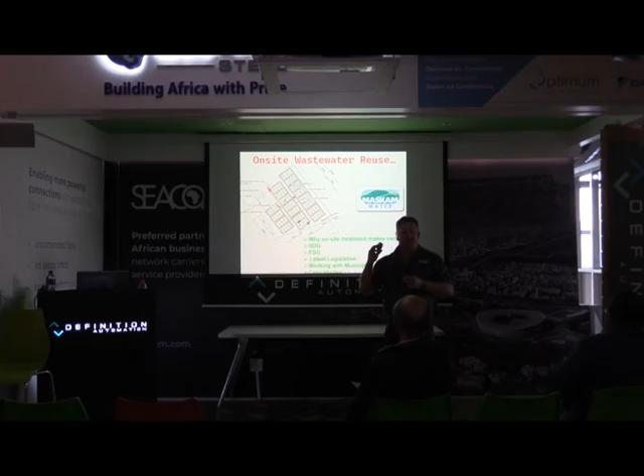I've been asked, did I do a presentation 2 or 3 years ago? Yes, I did. There's 1 or 2 slides that will overlap, but a lot of things changed in legislation, and I specifically focused the first part on where we are in terms of legislation and how we read legislation, because I've realized that often people don't understand what the law actually says. And I'm not talking about just people sitting here, I'm talking about people in municipalities and in government departments who misunderstand or misread legislation sometimes, and it can be a block. And if I can help you unblock that for development to move forward, then I'd be happy to do so.

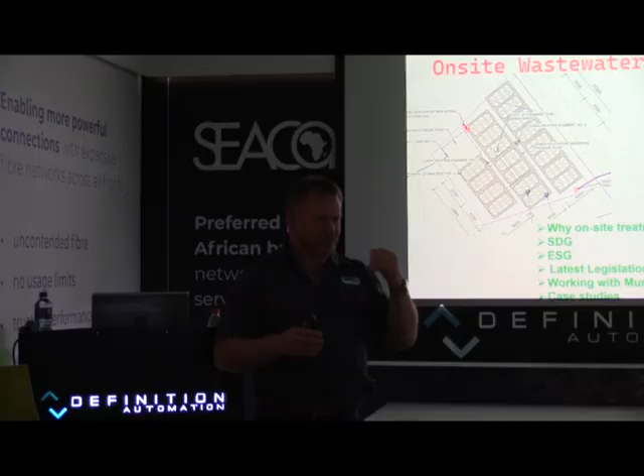Why do on-site treatments make sense? This is the current situation, or traditional situation. We abstract water from a water course, we treat it, we use it, we dump it, treat it, dump it. Now in Cape Town, this often goes to the sea.

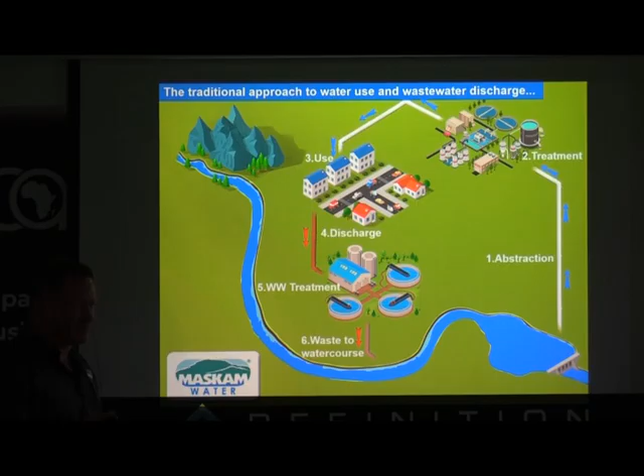And I said it in the previous session, I'm going to say it again, and I know there will be people taking me out for this, but then so be it. What makes no sense to me, in a Cape Town situation, we treat 600, 800 megalitres a day of wastewater, we pay money to treat it, then we dump it into the sea, and now we're spending billions to recover 50 megalitres a day of seawater in terms of reverse osmosis. It doesn't make sense.

Why would you throw away water that you've just treated, dump it into the sea, and then spend more money to desalinate seawater? And they tell me, no, it's to build water resilience. Nonsense. We're dumping 600 to 800 megalitres a day. We're abstracting 50 when the plant is up and running.

If you're on the Skeleton Coast, you've got nothing but seawater, then you've got to do RO. There's places for everything. I'm not against RO. I'm just saying we are wasting money in the way we go about water at the moment.

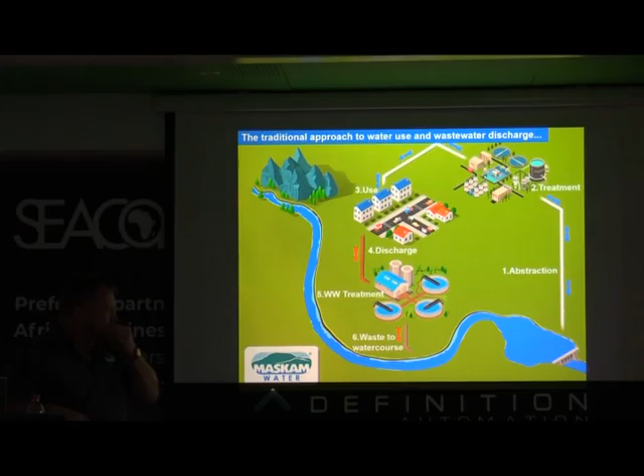The other thing, if you look at this picture, this is true for Bloemfontein. They dump there, and none of the wastewater treatment plants work, by the way. So they dump raw sewage into the river that feeds the dam from where they get their drinking water. Only mankind can be that stupid, eh? But the guys in Gauteng tell me, no, that's not a problem, because we didn't discharge there, we discharged at that point, below the wall there. I said, guys, that's great.

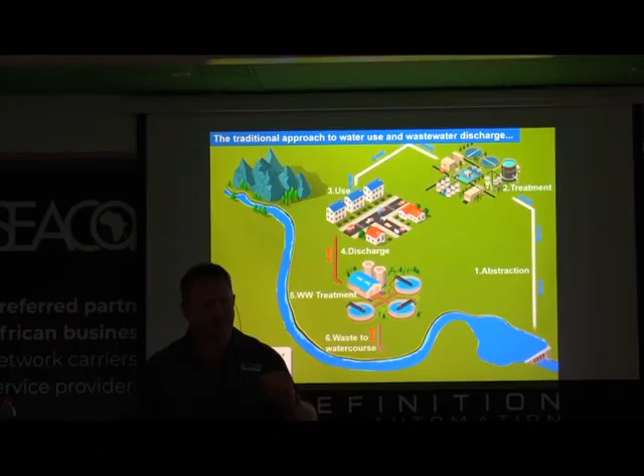Who of you will agree with me that eating healthy is good? And there was a crowd of over 100 people, and everybody put up their hands. I said, okay. Who of you enjoys some nice fresh grapes every now and again? And everybody raised their hands. I said, now you think that you discharge your wastewater into the Vaal River below the dam and you don't have a problem. You see, in Upington, the farmers have an E. coli problem. And that E. coli problem comes from you guys, down the Vaal and into the Orange River.

They pump out that E. coli, they irrigate their vines, and you import the grapes back into Gauteng. Full circle. So that mentality of it's somebody else's problem sometimes comes and bites you. But at the end of the day, we waste a lot of water the way things are currently set up.

What we want to look at is the possibility of on-site reuse. You may reuse 100% on-site, or you may use less than 100% on-site. Whatever you use on-site means you need less fresh water, you need less money to upgrade your waterworks, and you have less discharge, so you give your non-functional municipal wastewater treatment plants a chance to do a little bit better.

So we speak about a pollution problem that we solve. We speak about a freshwater availability problem that we solve, we speak about a lot of other stuff, as you will see, but in this point we also speak about water security. Because you have the water, you can use it more than once and increase your own water security or water resilience.

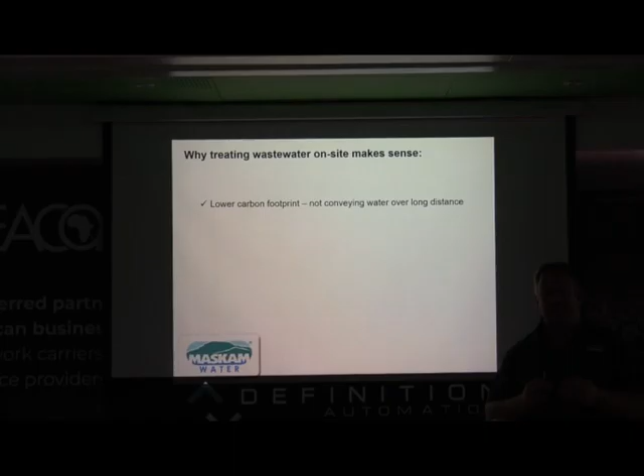Does that make sense to everybody? Right. So we say it lowers your carbon footprint. Now, water doesn't have a carbon footprint, does it? But your network of pipes, pumps, treatment plants. What is the carbon footprint of the network, the physical stuff? What is the carbon footprint of the electricity, coal generated? What is the carbon footprint of the chemicals used in the process? So your water that you use has a huge carbon footprint.

If you treat on site, you don't convey it over long distances. You bring down that total carbon footprint. Reduce pollution of our water courses. I don't think I need to elaborate on that one. Reduce potable water intake, because you reuse what you have, you don't take fresh water for everything. Increase water resilience. As I said, you have the water on site.

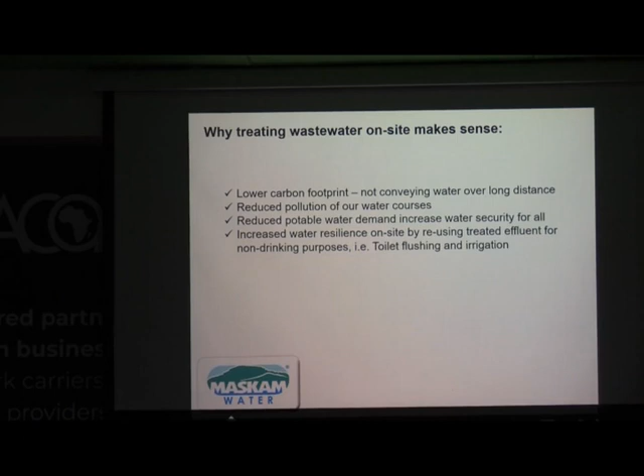Remember, if you look at Gauteng, there was a lot of media attention when they closed the Lesotho Highlands Tunnel and said, now Gauteng is going to have huge water restrictions. Well, they had enough water in the integrated Vaal system to sustain that period of closure. Now we had the Vaal Dam overflowing and flooding towns downstream, and we still had people in Gauteng without water. Now, how can that be?

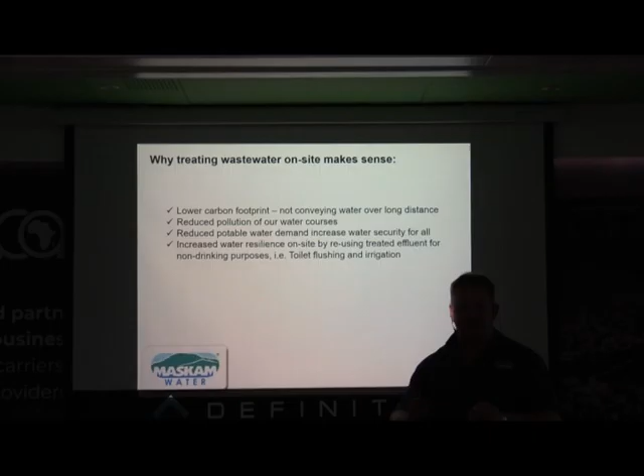It's very simple. The municipal infrastructure is falling apart. So you have the water, but you can't get it to the user. It's as simple as cut your veins, your heart is still there, you can still pump, but the blood is not going to reach your brain. That's the problem that we have with the water infrastructure.

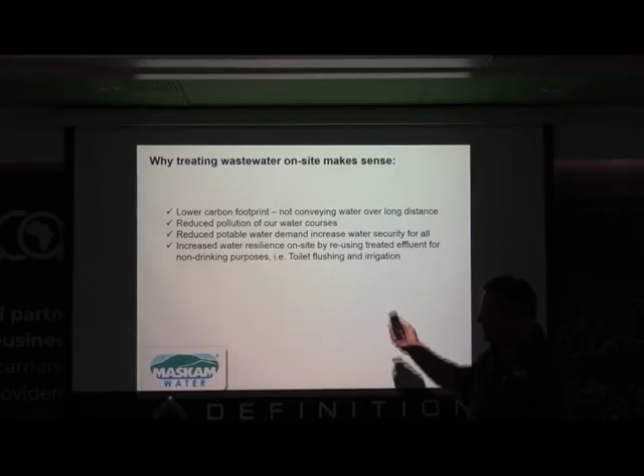You see, with electricity, we had an electricity generation problem, but we had a functioning network. Well, a few municipalities had problems, but in general we have a functioning network. So the minute you can add more power to the grid, everybody gets it. But in the case of water, you have the water in the dam, it's there, but the grid is falling apart. You cannot get it to the other end. And this is where on-site becomes very important in terms of water resilience.

Cost saving, treating on-site costs way less. And I'll give you an example. Cape Town's figures I don't have off the top of my head, but we did this exercise for somebody in Joburg. They have a commercial property. Now remember, your water cost is not only the cost of water, because linked to your water intake is a sewage cost. Now if you add the two together, you get your true cost of having water on site.

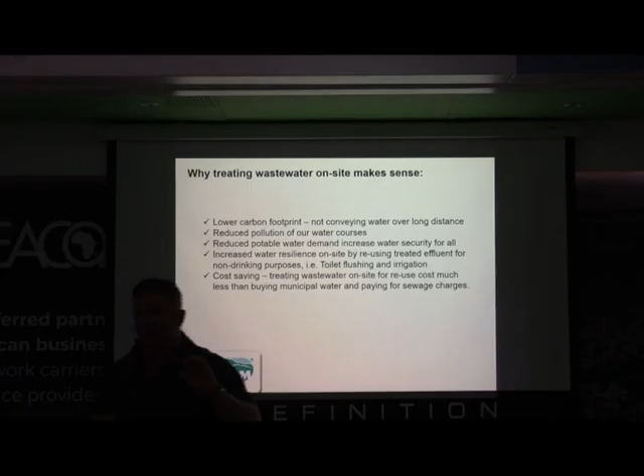So in Joburg, we did this one, and we took it off the customer's municipal bill. They pay 127 Rand on a commercial property per kiloliter for water and sewage. We can treat on site for 15. 127 down to 15. In their case, a saving of 1.5 million Rand a year. So it makes sense. And the more water prices escalate, I know Joburg's water prices went up 14% this year.

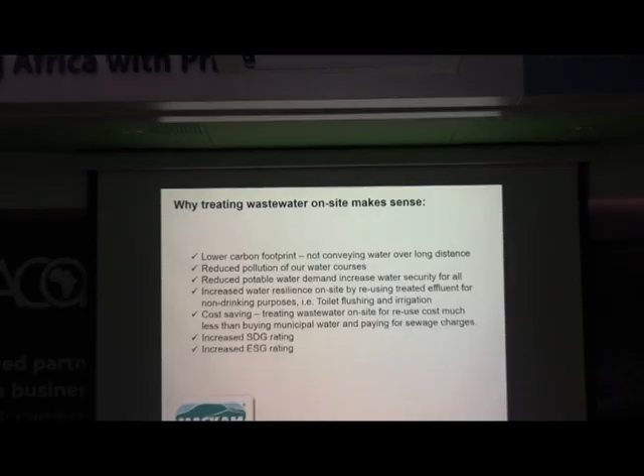Alright, increased SDG, we'll get to that, and increased ESG. How many of your customers need to get more points on ESG or SDG? You can help them by looking at their water. And if you want to go Green Star, that is now in the Green Star ratings as well. If you look at the SDG side, there's 17 of them, and we tick 14 of the 17 boxes, not all 14 at the same time.

No poverty comes with the installation, the maintenance, and sales of the systems. Zero hunger, you can use treated effluent to plant crops. You can speak to hunger there. And we've got schools and stuff that's doing that. Good health and well-being, a lot of the health problems we have come from polluted water or polluted soil where children play. When you address a sanitation problem, you address the pollution of the soil, you address the pollution of the water, so you address a health issue. I mean, where does cholera come from?

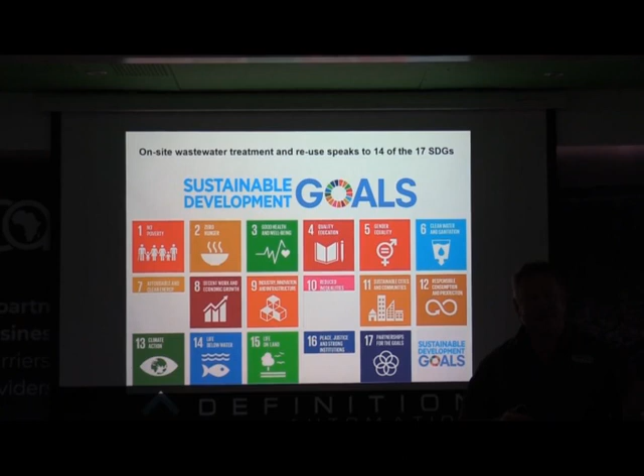Quality education. We often find that in your rural areas and your poorer areas, school attendance is higher where you have proper ablutions compared to a school that doesn't have proper ablutions. So that's why we speak to education, especially amongst the female learners. Gender equality speaks for itself, clean water and sanitation speaks for itself. Decent work and economic growth in two senses. In the sales, the installation of the systems, the maintenance of the systems, you create jobs wherever the systems go.

But this enables development to continue where otherwise it wouldn't be possible. So the direct benefit of this is small compared to the network that you unleash. Because the minute there's new development going up, there's streets, there's water pipes, there's electricity, there's security, there's garden service, there's domestics, there's all sorts of other stuff. It's a whole economy that you unleash when you develop. And if you don't have a wastewater solution, you can't develop. That whole network comes to a standstill.

Industry, innovation, and infrastructure. This speaks specifically to innovation and to infrastructure. Your infrastructure is now contained to the site and not the grid system. Sustainable cities and communities. With the reuse, you speak directly to that. As with consumption, responsible consumption and production, you are responsible in not polluting, you're responsible in reusing. Climate action, obviously. Life below water, because we don't pollute our water courses anymore. And life on land, because we can actually use the treated effluent to grow something.

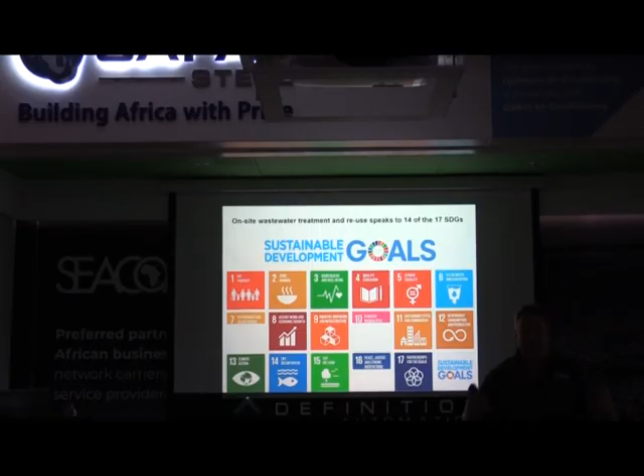And lastly, partnerships for the goals is where professionals, manufacturers, installers, maintenance contractors, the finance houses and the customers who need this work together in partnerships, not necessarily formal partnership as in sharing the same bank account, but partnering on projects to make this happen. So we speak to 14 of the 17 SDGs.

ESG, a lot of your SDGs are taken up in this, but your governance part is very interesting where you identify and manage the environmental and social aspects. So that's where your governance comes in, is to look at and see how everything comes together to the greater benefit of mankind.

There is a new regulation out. It's in a lot of the press, 6th of June this year. And this is going to change how your future developments will look.

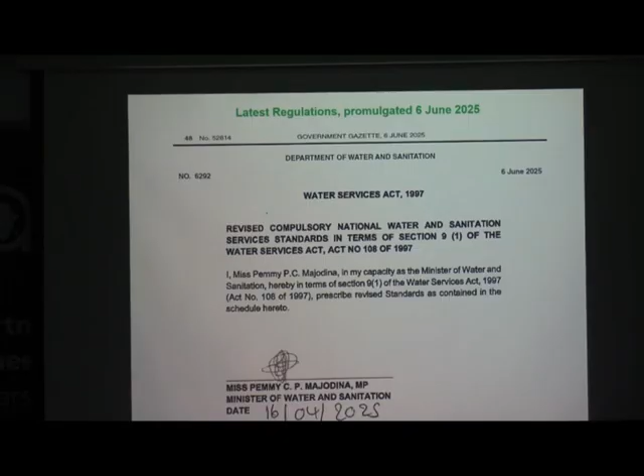How many architects do we have here? Engineers? None. Okay. I was in trouble in Bloemfontein for speaking too much to the engineers and not enough to the architects. So here you don't have that competition.

This will change how you design buildings going forward. I'm giving you one snippet now, we're coming back to this later, but this snippet says, municipalities and water services authorities are prohibited from approving bulk user connections to existing water and wastewater systems without having the necessary capacity to service that. It also says municipalities may not approve any new developments that will connect to an existing wastewater treatment system unless such a system has the capacity to deal with an additional load.

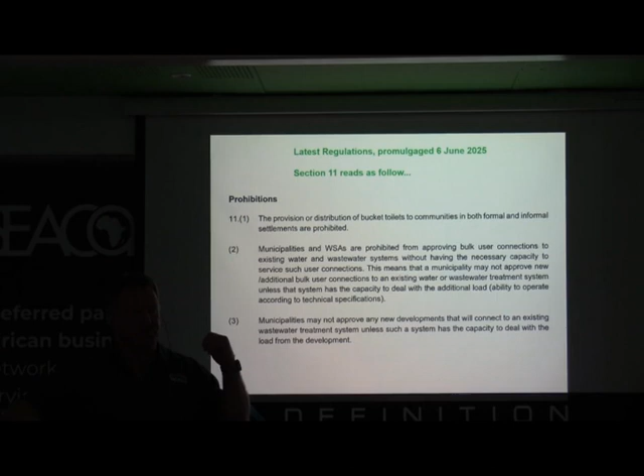What that means, in the previous session we had somebody here who said on Baden Powell they have a problem with a sewer line that is over 100% capacity. They're upgrading the plant on the other end, so the plant has capacity, but the sewage is pushing out through the manholes because the line is over capacity. In terms of this regulation, no new developments may be approved that discharge to that line because there is no capacity. It's not only about the treatment works, it's about the entire system.

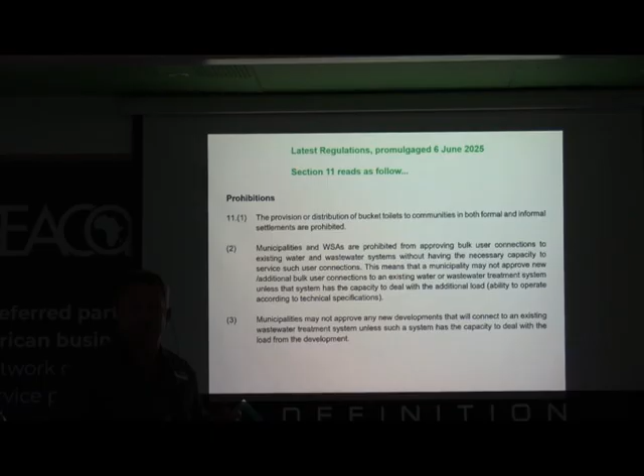Now we'll get to another slide and I'll show you there what I mean, but 80% of South Africa's municipal wastewater treatment plants are in a bad state. This stops all development in 80% of the country. So what do you think of that? What will it do to your business? What will it do to the economy? What will it do to your customers? It's good from a pollution point of view, but from an economic point of view, this is a mess. You agree?

There's light at the end of the tunnel, but we need to go through a few more things and I'll explain to you how it all fits together. But note that when you design, because many of you will not only work in the City of Cape Town, you work outside the city, you work in other municipalities as well. So this is something to keep in mind.

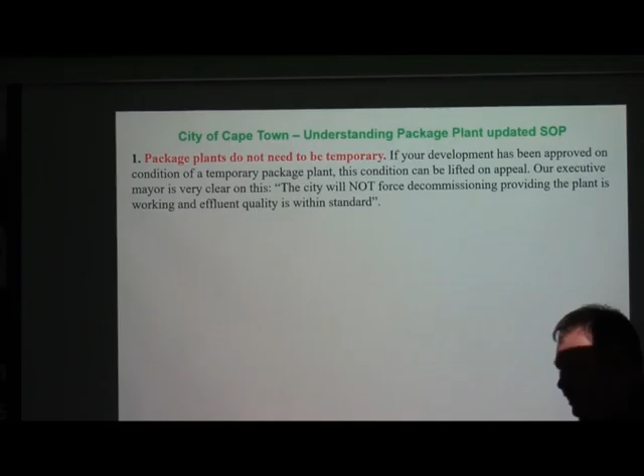Where do we stand with the City of Cape Town? And I won't say upset, but I'm disappointed that the city's communication on this is very poor. Remember in August of 2022, they brought out the standard operating procedure for package plants for the catchment areas of Zandvliet, Macassar, and Potsdam. And up until that point, they stopped all development for those catchment areas.

And then they brought out the SOP and said you can now develop if you install your own package plant. But when there's capacity, you must disconnect it and decommission it and remove it. Now, nobody is going to spend 5 million on a package plant to remove it 3 years down the line. That's a waste of money.

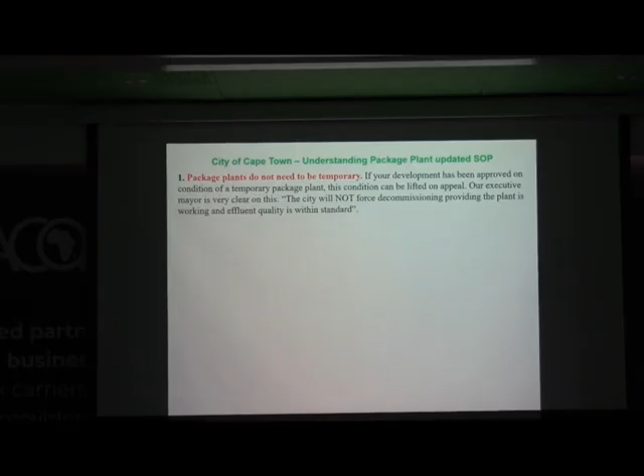So, what has not been in the official communication, but it's been repeated in many meetings and in workshops that I attended: Cape Town has changed that policy so that you don't have to be a temporary installation anymore. When there is capacity, you can now, as the owner, decide: do you want to keep using your package plant, or do you want to decommission and reconnect to the municipal system?

Just a show of hands for my own reference. How many of you knew about this? That it can now be permanent. That's what upset me. Because now there's one thing you need to be careful of. The system must comply to DWS standards if you want to keep it. Which makes a lot of sense, because if the effluent doesn't comply, you pollute.

So everybody who now ran and bought the cheapest, and I know there's a number of them, let's not go there. Everybody who ran and bought the cheapest junk just to get approval from the city, because it was going to be a temporary thing, they can't keep their systems because the effluent quality is not good enough. If you buy a proper system, you now can get all the benefits.

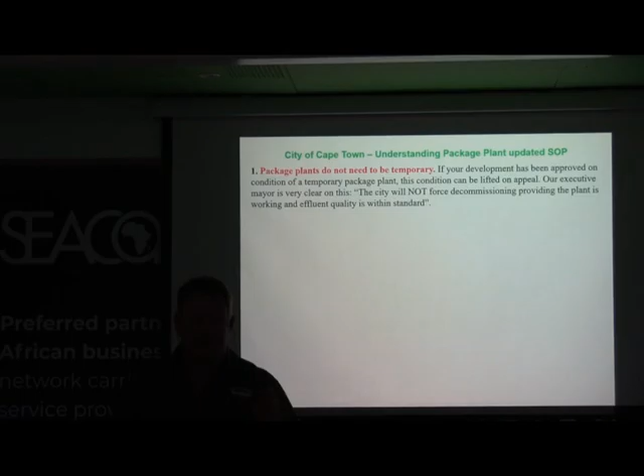And remember the banks, these banks are slowly catching up on this. There's already green bonds out there. They haven't really made water or recycling part of the green bonds, but that's coming. I can tell, working with them. So now you have a greener development. You don't have to decommission anymore. Your DC for sewage will be discounted. Do you know that?

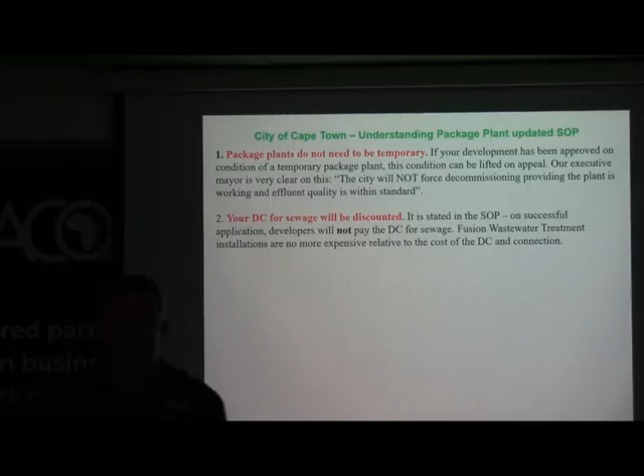If you install your own wastewater treatment plant and you don't connect to the municipal system, they won't charge you the DC for sewage. They will charge you the DC for roads and power and everything else, but not for sewage. How many people knew that? You see how this now becomes affordable? Because I spoke to a developer beginning of last year, and he asked me, what's the cost if you do group housing, gated community housing? I said, well, depending on the site, but you're looking at about 35,000, 40,000 rand for our kind of technology per house, family of 4.

He said to me, but Gerard, currently it costs me 40,000 rand a house. To pay the DC, to get the pipe to this network and the physical connection, costs me 40,000 rand a house. So what you're telling me is this is going to be no money out of my pocket. Because what I pay here, I save on that side. Does that change how you will interact with your customers and how you will design?

You will also not pay for sewage charges if you're not connected. They can't charge you for sewage because you're not making use of the service. So you save your customer money on the monthly bills, which pays for the running cost of the plant. Again, it doesn't cost them money out of their own pocket.

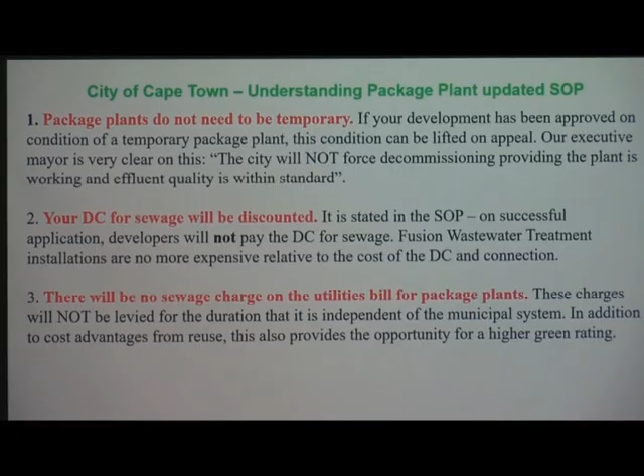And the 2018 bylaws of Cape Town say that all new developments and renovations must use water conservation and demand management systems or an alternative water source for non-drinking purposes. This is your alternative source for non-drinking purposes. And that has been confirmed in workshops with Cape Town. So you now not only solve a development or a wastewater issue, you immediately comply with the Water Amendment Bylaw of 2018, and you have alternative water for your irrigation or toilet flushing, your non-drinking purposes.

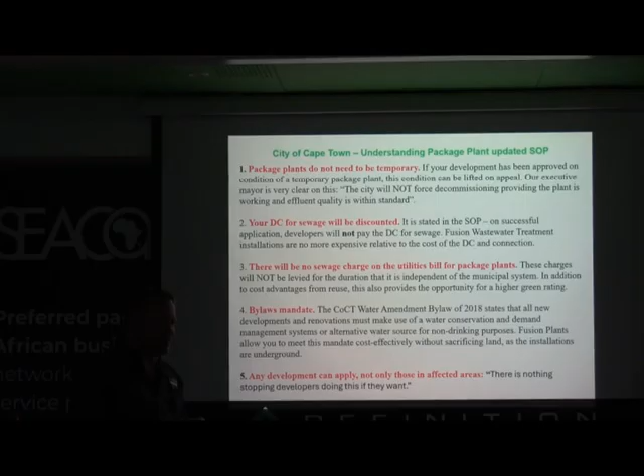And then they expanded this because people started complaining and said, listen, I have a development in the Zandvliet catchment area and I can install this there. But I want to do a green development in the Pinelands catchment area, and now they're telling me I can't. This is double standards. So the city said, okay, any development can apply. You don't have to be in the designated areas.

It is still on an application basis because they obviously need to know where the stuff is. You still have to do your WULA, your GA and all the other stuff that goes with it, but anybody can apply anywhere in the city now to install this.

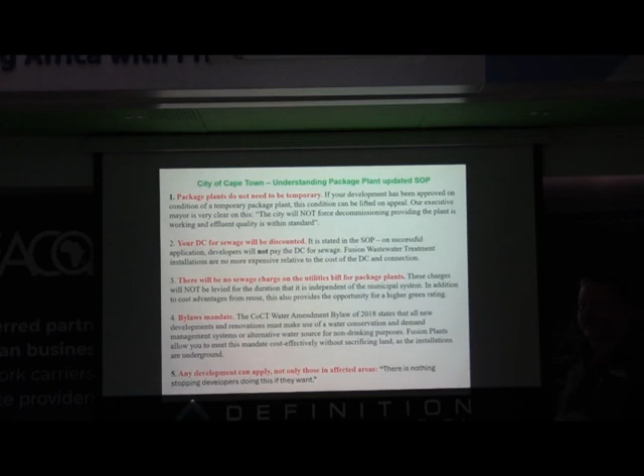Okay. Are there any questions on this one before I move away from the city? Yes, sir. To ask about your example, in the sense of there's a development, would you need one of these packages per household? You can have it for the gated community. It doesn't have to be per individual house, but you cannot cross property.

In other words, if you have a gated community, at the end there will be a responsible body for that gated community, and that will be the HOA or it will be the body corporate. You cannot cross over to the property next door that has a different HOA or a different body corporate. That's a different legal entity. But ultimately on a single residential, it's your house, it's your property, it's your problem. You can't give it to your neighbor.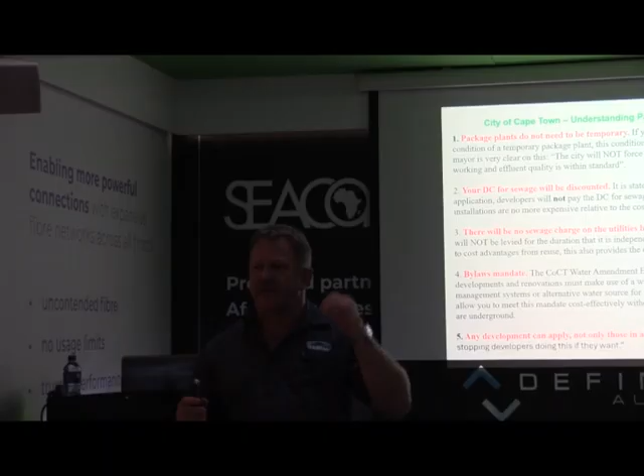But if it is in a gated community, a gated development, then this service will become part of the HOA or the body corporate responsibility, as will be the internal reticulation, the internal electricals, the fencing, the security, all of those services that will eventually fall under the body corporate or the HOA. This will form part of that. So as long as it's under the same legal entity watching over it, you can group them together. The cost is much better if you group them, and I'm answering questions now from the previous session.

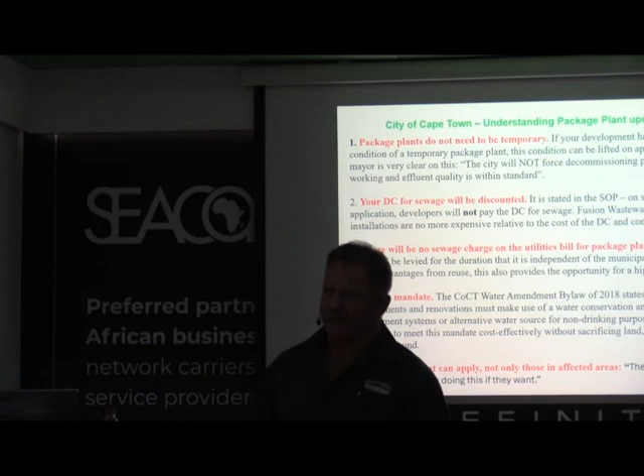A single residential, you're looking at just the plant cost as it stands on the factory floor without installation of 120,000 rand. If you group 20 houses together, the cost comes down to 29,000 rand a house as the unit stands on the floor. So there's a significant saving if you can group them together. It's not always practically possible, but the nice thing of this as well, and you'll see it when you get to the case studies, is if you have a large development, you don't have to bring all of that into one spot.

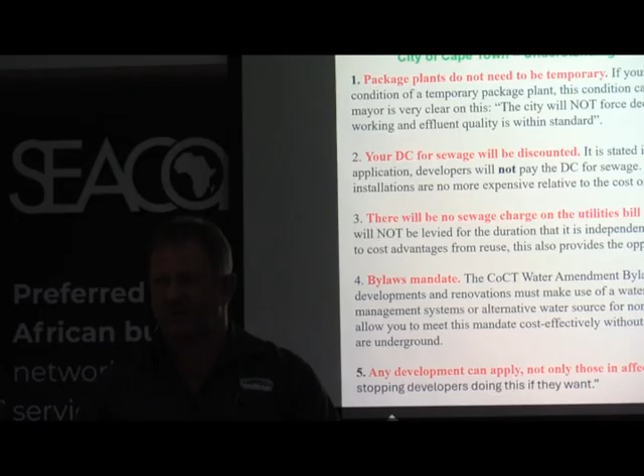So he doesn't have to fork out hundreds of millions to build a plant before the first house can occupy. That plant can do 500 houses, but house number 500 will only be sold in 20 years' time. Well, then the plant needs a rebuild anyway. So it saves a lot of those problems as well. I know it's a long answer to your question, but I just want to give some more context to it. But did I answer your question? Yes. Okay.

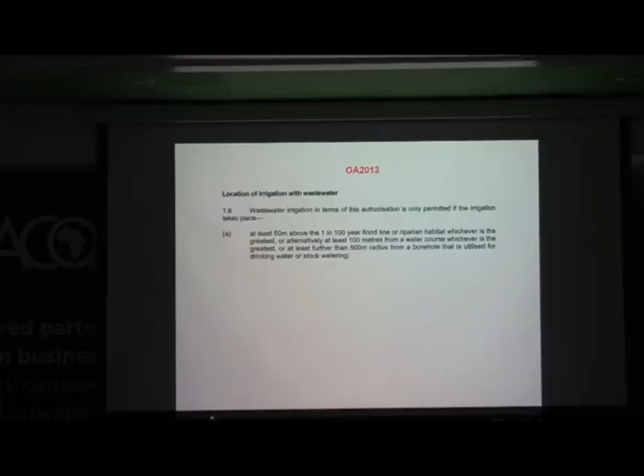Right. Now I want to get to the National Water Act, and this is the GA of 2013, and just show you our interpretation of the law is very important. Because the GA of 2013 said you may not irrigate with wastewater closer than 500 meters from a borehole that is utilized for drinking water or stock watering.

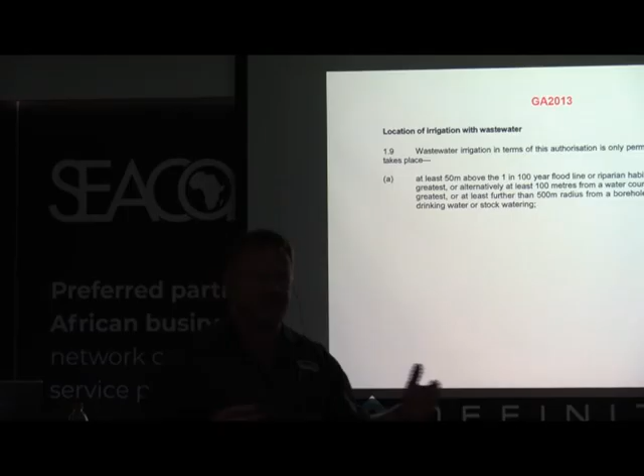So we had a number of applications done down here, because if you take the wastewater treatment plant and you pin that and you go 500 meters in either direction, you're on the neighbor's property. So what do you do now? Your neighbor is not going to want your shit. Sorry to be blunt about it. So the development can't continue, and we had a number of applications declined. Because what do you now do with the treatment? Where do you go? And I wrote to DWS.

Sometimes it takes a little bit long to actually get the message, but I got the message, and I wrote to DWS and said, listen guys, this legislation said you're not allowed to irrigate with wastewater. But we don't want to irrigate with wastewater. We want to irrigate with treated effluent that is treated to a standard where DWS say you can actually discharge into a river. So why can't we irrigate it? And the answer came back. The pink was my message to them.

And they said, within the range of 500 meters requires a license. That's a normal WULA, that's okay. If treated to a general limit or special limit could be considered under a GA and not a WULA. Look at the standards required for volume 0 to 50 megalitres a day and above. Now the development can continue, because now we understand what we're dealing with. We're dealing with treated effluent that we want to irrigate with, and not wastewater. But this has been misinterpreted by every single municipality in this country, I can tell you.

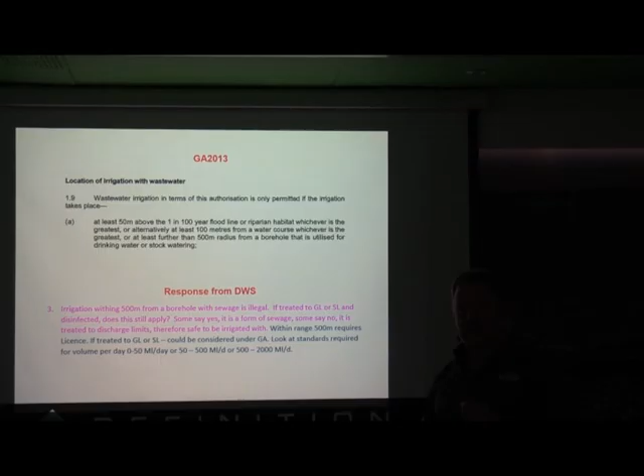So that's why I say, if you come across a problem, come speak to us. Let us help you where we can. I don't have friends that can do me favors, but I've been in this trade for 15 years now, and I've learned a lot about how the legislation works and how it's been put together. And how there's no ways to get around it. We don't want to get around it. We just want to implement it in the form that it was originally designed.

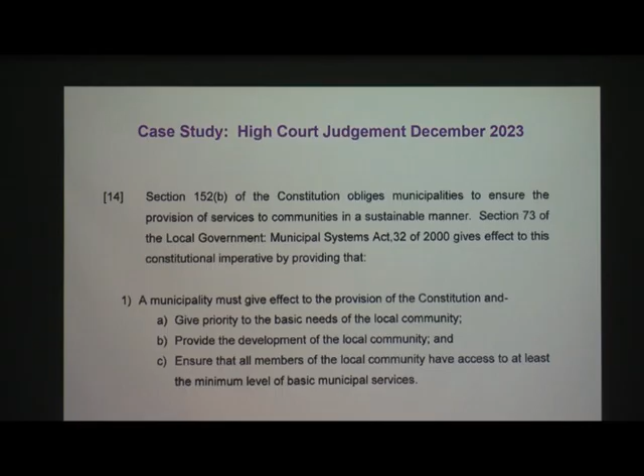And this legislation speaks to wastewater, there was an interpretation problem. Another one comes forward in this case study. Section 152B of the Constitution and the Municipal Systems Act of 2000, the Act 32 of 2000, say municipalities need to provide services. Municipalities need to provide roads, stormwater, electricity, water, sewage, all the other stuff. But it's not optional. The Constitution says so, and so does Act 32. Municipalities have to deliver those services.

Act 32 goes a little bit further, and it says a municipality may deliver such service through a third party. They may outsource it. But if that contractor doesn't perform, the municipality may render the provision of services through third parties. It does not relieve the municipality of its constitutional obligation. So they cannot say we outsourced it, it's not our problem anymore. If they outsource it, they still have the legal responsibility to ensure that the service is rendered. And if the third party doesn't perform in terms of the Act, the municipality needs to take over the management of that service so they can continue delivering the service.

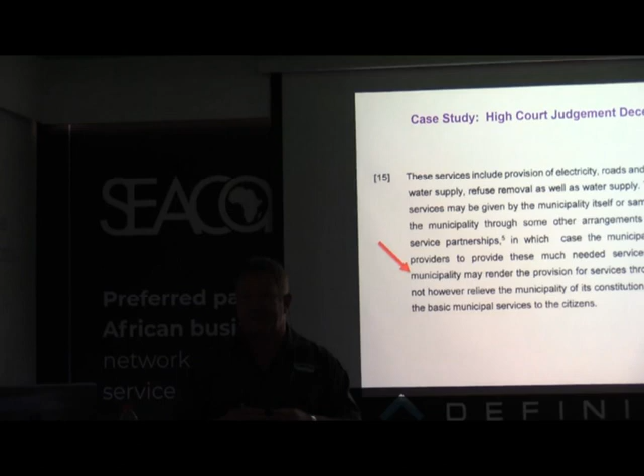With that in mind, municipalities took the stance of, we have to provide this service, so we have the sole right for providing services. You will use our service, you will pay us, finish and clear. In this case, the HOA took the municipality to court, and the court said it's an executive and legislative competency of the municipality and not a right of the municipality. In other words, they must deliver services to the community, but they don't have the sole right to deliver services to a community. You can install your private service. That's in essence what the court said.

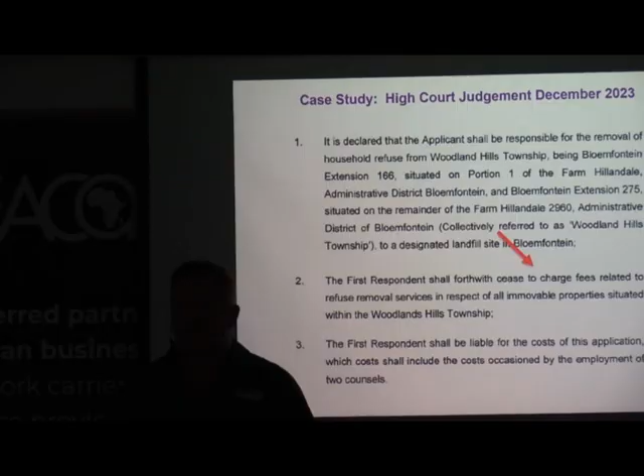The court went further and said that the municipality may only charge for services that they render. In this case, it was refuse removal. If you remove your own refuse, you don't have to pay them. And it actually said the municipality must cease charging fees for refuse removal for this specific community. It's a gated community. They do their own thing. They take their own stuff away. Why must they pay for it? And the court agreed with it. So this is very powerful. See the look on your face. You're thinking already about projects.

Now, another one. This is a government department turning down an application for somebody, or not really turning down, but putting provisions out there for somebody to do on-site wastewater treatment. And they say that the municipality must now sign an SLA with a private developer. And if the private developer's system doesn't work, the municipality must take over the running of that service. And they refer back to Section 152 of the Constitution and Section 73 of Act 32, the same one that we just had in the court case.

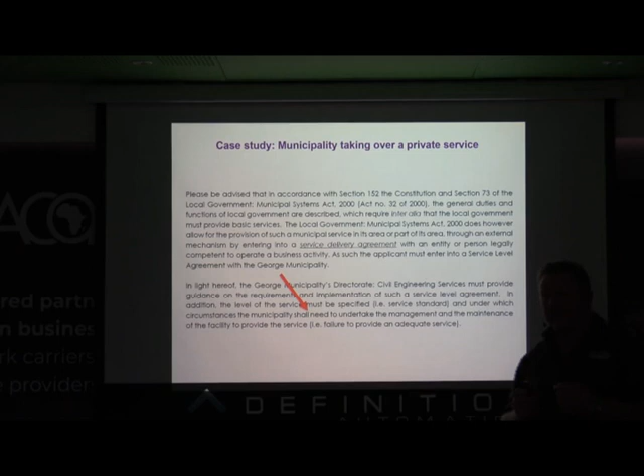Now there's a few problems with this statement. First of all, a government department cannot instruct a municipality to enter into an SLA. They don't have the authority to do that. You have separation of powers between the national, province and local. So this department cannot instruct a municipality to enter into an SLA. That's the first problem with this. And some people say, well, this is not coming from the department, that's how it is. No, it's not.

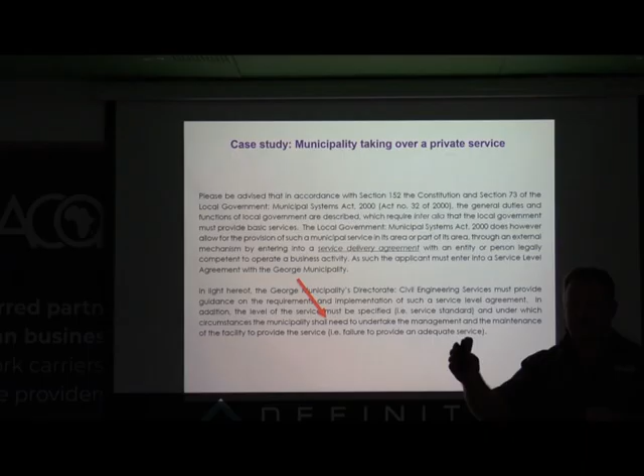Secondly, this is a private service on private land. Neither Section 152 of the Constitution nor Act 32 speaks to private service on private land. They're speaking to municipal services delivered to the community. So none of those are applicable in this case. The municipality may set certain things that need to be in place for you to deliver the service, but they cannot just take over.

And then you've got a legal opinion on this. And the legal opinion in essence said, if you read what they say there, and if the municipality were to take over the running of that service, remember, it's a non-moving asset, because it's a fixture on site. If the municipality would just at random take over the running of that service, it comes down to a subject that was debated a lot in politics over the last few years.

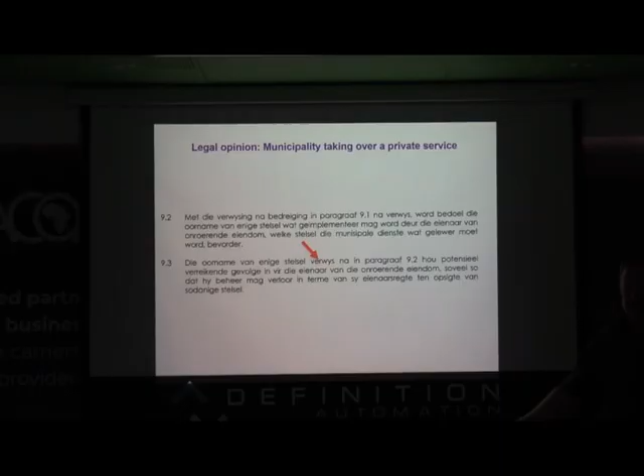Expropriation without compensation. Here's no court case. There's nothing here. The municipality says, sir, you installed that system, it's not running to my standards, so I'm now taking control over that system. Legally, that comes without. So the department is out of line. But a lot of people say, oh, the department said this, that's a higher authority than the municipality, so okay, now we've got, no. Understand the law.

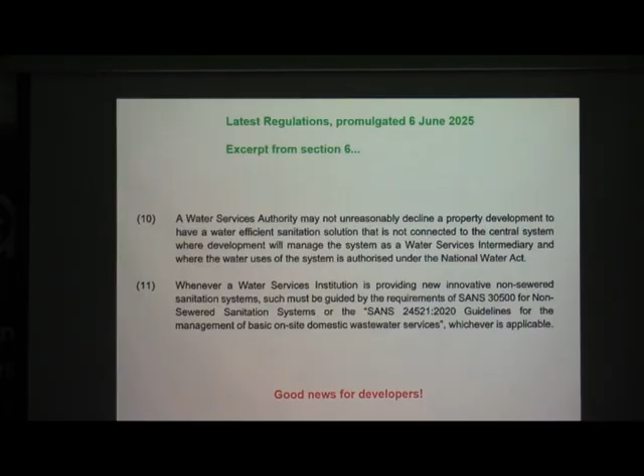It's largely the cost factors. It's all very well saying, okay, it's more viable to go ahead with a project of this sort of nature if you have a development where you've got 6 or 8, 12, whatever houses in a complex making use of the system. But making use of a system of this sort of nature for a single property, unless I'm wrong, it seems to me the amortization costs and period is probably going to be quite high.

That depends on municipality to municipality. It can be. But you also need to understand if you don't have a network, what do you do? If there's no capacity in the network, what do you do? So I don't see this as the golden leaf that everybody will run this way. I don't see this as taking over central systems. I see it as a combination. This is another solution. It's like PV solar on your roof. You may have PV solar, but Eskom still exists. This is going to be a similar situation in the water sector.

But what we found is customers don't have the skill to operate systems. So they need to get somebody from outside. Visual impact, they often look ugly. Where's the architects now? Visual impact. Noise pollution, because the pumps and stuff that run, they're noisy. Odor, you're dealing with wastewater. You're not going to want to live in that stench. High maintenance cost, high operational cost, poor quality effluent.

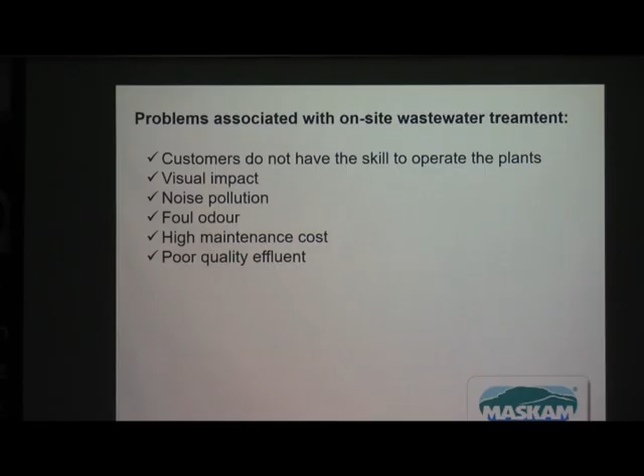Now what if I would tell you there is a system that can take care of that? Would you then be interested? They can show you. That's the baby one for a single house, and that one does 20 houses, just to give you an idea. 20, 40, 60 houses fit onto a truck. No customer intervention required because the system monitors itself. It will warn you if it's unhappy.

No visual impact, and I'll show you that. No noise impact. That system, if it had to run here now, you won't hear it. There's too much environmental noise, even if I shut up. No foul odor. You don't quite believe me if I say no foul odor, right?

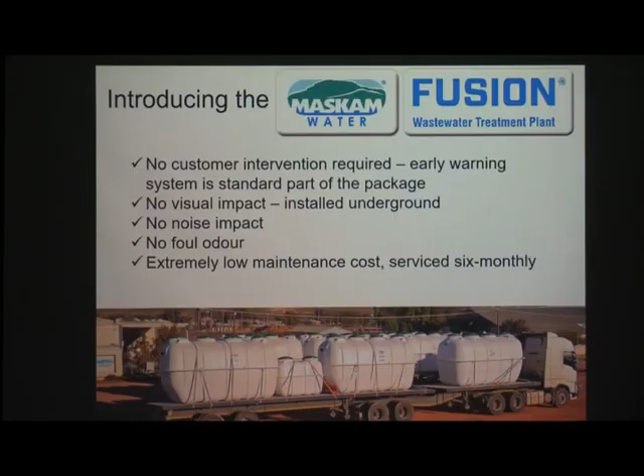What you will see when you look at brochures and marketing material, in some places you will see Clarus Fusion treatment system, and in some places you will see Maskam Water Fusion wastewater treatment plant. So it's the same name and we're now in competition. Clarus, we used to import from Clarus in 2010. Then we started doing some local parts. And in 2023 we bought the Fusion from Clarus in the States. And it is now South African. So it's the same system. We just bought it.

And the reason why we bought it, the parent company is Zoeller. Their main business is pumps. This for them was a fringe product. They do about $500 million a year of pumps. They build 4,000 pumps a day. So they decided to get rid of their fringe business. For me, it was my primary business and I bought it from them. So the way they used to supply Mexico, we now supply Mexico from here. That's how simple it is.

That's our factory in Vanrhynsdorp. So the fusion's been in South Africa since 2010. It's got some track record. Now 100% South African owned. Locally manufactured in Vanrhynsdorp, waar die mooi blommetjies is. More than 400 units sold, 10 African countries, Mauritius, UAE, South America, and I can actually now add Mexico. We've got some out in Mexico, we've got the Cayman Islands, and a few others as well. And installation and service contractors around the country, so we don't have to go out every time something needs to be done. They are trained contractors and we are still training contractors.

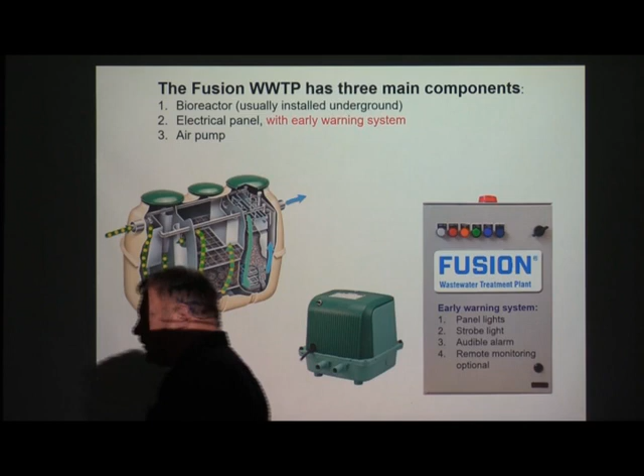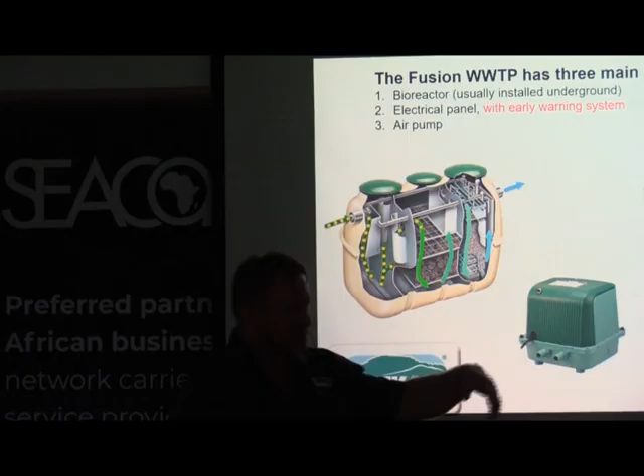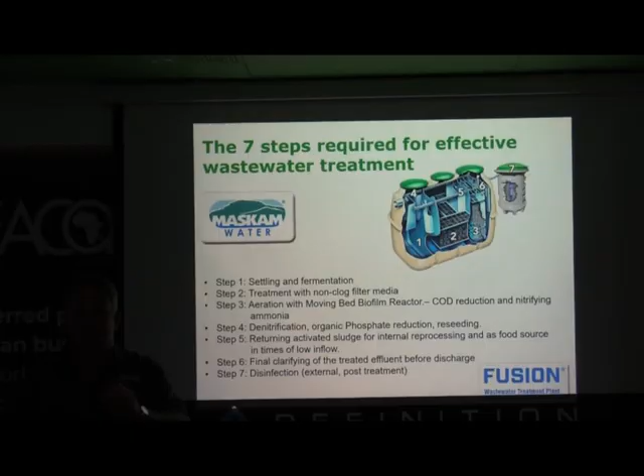And we see that most small systems on the market have 2 or 3 stages of treatment. That's not enough to comply to DWE standards. It's not enough to give you good quality effluent. There are 6 steps plus disinfection as step number 7. And I can mention by name which of the systems on the market has got 2 stages and which has got 3 stages. I've only seen one with step number 4, 5 and 6, and it is this one. If you don't have those steps, you cannot remove your nitrates, you cannot reduce your phosphates, you cannot comply. So when you look at systems, this one will be the more expensive one, I can tell you now. But for a reason.

If you now take a car and you remove your ABS and your traction control and your sound system and your auto headlights and your climate control and all those things that make the car work perfect, you take out your electronic engine management system and go back to the old carburetor system, you can build a much cheaper car. It's the same with these things. If you have 3 steps and you have 6 steps, there's a big difference in the quality of what you will get out on the other end.

It's as simple as that. And I always use the example because I had both. I used to have a Nissan 1 ton 2.5 diesel. The output of the engine was 55 kilowatts. Now I drive the new Navara 2.5 diesel, and the engine output is 140 kilowatts from the same engine block.

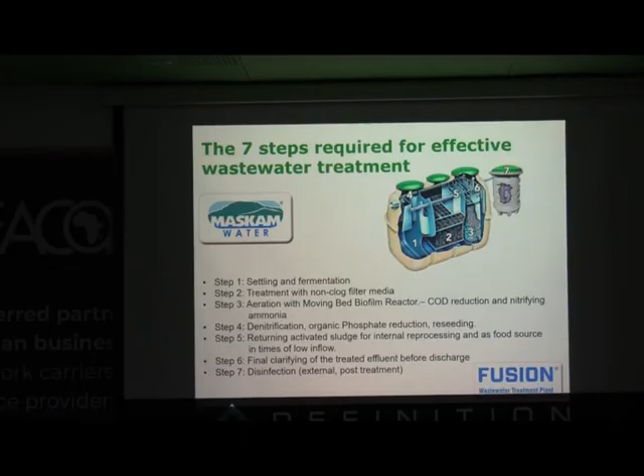Both are 2.5s. But it is now the turbos and the intercooler and the electronic management that take you from 55 to 140 kilowatts. Same with wastewater treatment. It costs a little bit more, but you get so much more out on the other end. So be careful, especially from a professional point of view, to specify something that will not comply at the end.

And if you're not sure, and you get quotes from different people, you're welcome to bring it to us, and we will evaluate it from a technical point of view for you. By then you have all the information, you have the pricing, and we will be happy. We've done it for a few customers already, and we will summarize and say this is the good and bad of everyone, and then you can make a decision from there.

And we've had that. We had a case where our plant just kicked butt compared to another one. The other one was slightly cheaper purchase-wise. The running cost was a lot more expensive than ours. And over a 20-year period, you could almost pay for our plant twice with the operating cost.

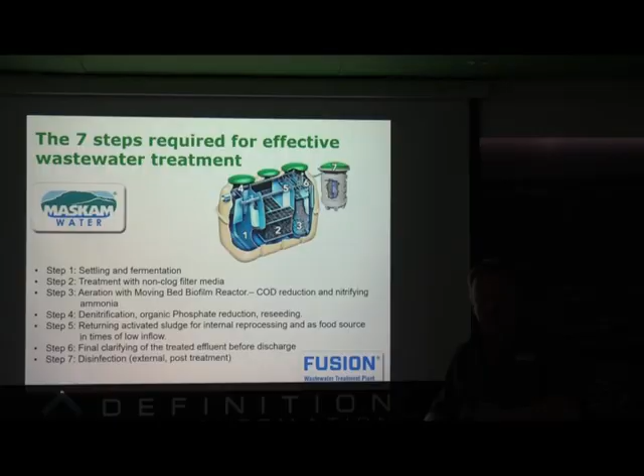But the customer at the end, he owns a Toyota truck dealership, and the guy who supplied this other plant buys all of his trucks from him, and he decided to support his customer. Good. He's got all the facts on the table now, and he can make a decision. Unfortunately for him, the other plant didn't work. That's another problem. But what I'm saying is we would be happy to help you sift through this, because this can become quite tricky. There's no obligation, no costs.

Show of hands. Who of you will be comfortable to install a wastewater treatment plant in the middle of the city, in the high density city area? 2, 3. Who of you will be comfortable to install a wastewater treatment plant in a building? Is that building a residential building or commercial? Commercial. In a commercial building in the city. In the basement.

Who of you would be happy to install a wastewater treatment plant in the city, in the footprint of the building, at the Department of Environmental Affairs? I won't answer. What if I told you we did it?

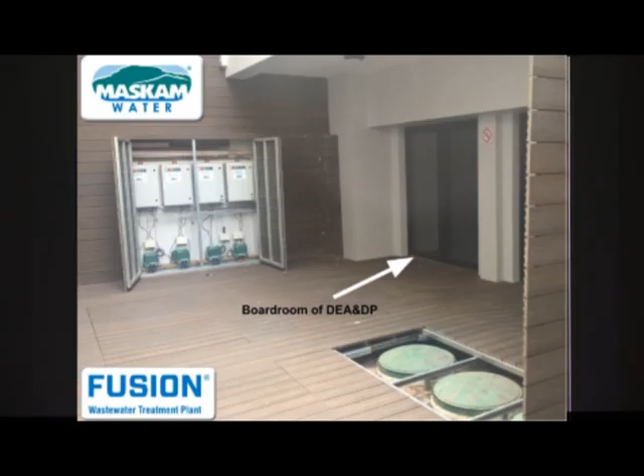Cape Town, Department of Environmental Affairs and Local Government, Premier's Office, Supreme Court, and that at one point was Parliament. There's no space, except for this quad in the middle of the building here. So we installed the wastewater treatment plant 2 meters from the boardroom of Environmental Affairs, in that quad. And for the last 6 years we flushed the toilets with treated effluent.

100% of the toilet flushes with treated effluent, 50% reduction on the water consumption. The other 50% is showers, drinking water and stuff. How much? In this case, it's 4 kiloliters a day. It's about 1 million liters a year. We can do bigger volumes, but that was the need for this building.

There are 4 small plants there. 1, 2, 3, 4. And the reason for the 4 plants is because we had to carry them through the building to get them there. There's no other access. You can't get a big plant through. You can't go over it, you can't bring a helicopter in because it's a no-fly zone.

So the only other way would be to put up one of these big cranes to get it over the roof. I mean, it takes you a day to put up the crane and then lift one tank and break the crane down. With traffic and everything, it doesn't make sense. So we put 4 small plants.

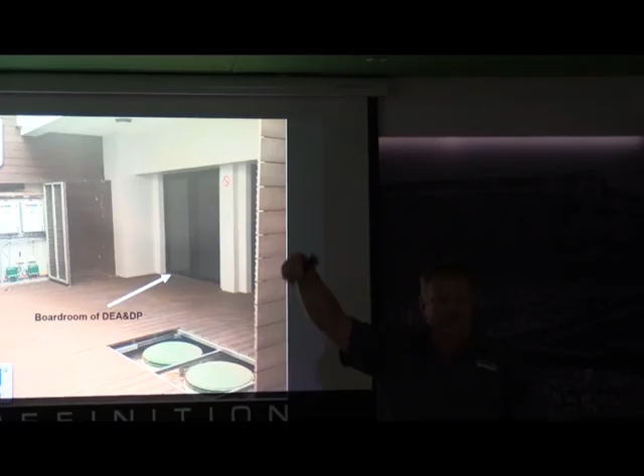How the system works, and now I took out those slides to cut down on time, and then I got the question anyway in the previous session. So what happens is on the ground floor, next to the clinic, they have the discharge point. They have the stacks coming down, joining up next to the clinic, and then discharged to the municipal sewer. On the roof of the building is a header tank that supplies the toilets, and toilets now have their own supply separate from the basins and the showers.

So when the roof tank drops to 80%, it demands treated effluent from the plants that's in the courtyard. So the treated effluent flows into a lifting station in the courtyard, and we then pump it up from there to the header tank on the roof. When the level drops in the lifting station in the courtyard, it demands raw sewage from the raw sewage lifting station next to the clinic.

So there, we pump the sewage up, through the ceiling, over the reception, back down in the courtyard, treated there, lifting station, up to the header tank on top, and then back down to the toilets. Quite an intricate system that we've got there, one part having to speak to the other. But it works for 6.5 years. And we often have meetings there, and you can go and have a look at it.

Okay. Who here would be comfortable to install a wastewater treatment plant in the city within the footprint of the building? Oh, now it's nobody. Now I had a few, and now there's nobody.

I want to ask you a question. What do you do with the waste as such? I mean, there's also a lot of fibers from toilet paper and that sort of thing. Those sort of products are biodegradable, or tree-based, if I can use a term. But they also take time to decompose.

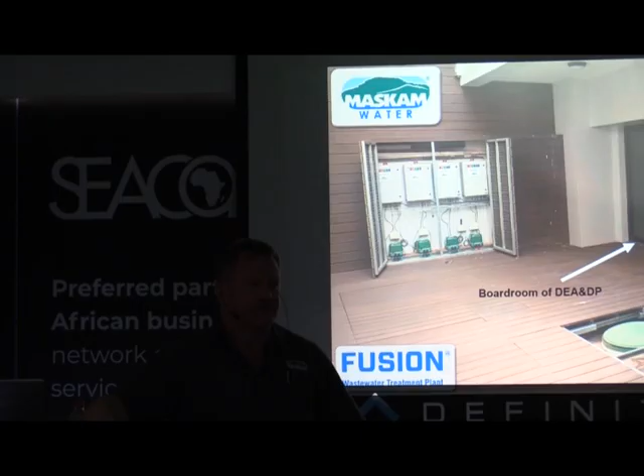So your biological stuff will degrade in the system, no problem. You'll build up a bit of sludge. Normally on your package plant you will remove sludge every 6 to 12 months. This one you're looking at every 4 to 6 years for sludge removal.

We were at a site this morning where engineers wanted to see this thing in operation. And it actually worked out quite nicely. It wasn't planned that way. My office phoned the customer and said, would you mind if we bring somebody there to have a look at the system? He said, by all means do it. So we arrived on site, and this is a long plot in Jamestown, Stellenbosch. And him and the neighbor share a common entrance. They get along well, there's no fence between them.

So as we drove down and stopped, the neighbor was coming up from the bottom. And he pulled over, and I said, I haven't seen you for a while, how are you doing, and so forth. And I said, well, these engineers just wanted to see this guy's system. I said, but while you're here, this man also owns a system, the neighbor. And the neighbor said, yeah, and the guy down there, if you just walk around the corner, that guy's got one, and that guy's got one, and that guy's got one. So it started off with one guy and all the neighbors bought the system.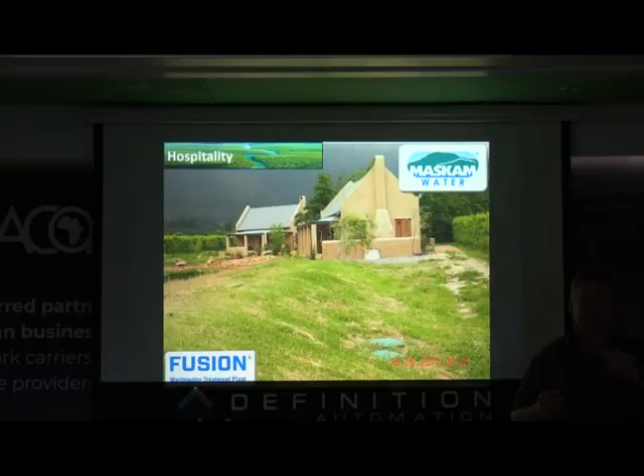And the sludge that normally is a waste that needs to be taken away, the sludge in this case is the food source for your bacteria. So what will happen in peak season, it builds up the sludge layer. In off-peak, it lives off its own sludge layer to stay alive. So it takes this sludge back to points where it's needed for digestion to keep the biomass alive.

This one, you can see the photo here, 2012. To the best of my knowledge, that one hasn't been desludged yet. I stand to be corrected. If it was desludged, it will be once. Because of the off-season where it uses its own sludge as a food source. You can go for up to 6 months with no inflow and still have a live biomass.

Can I ask a question? How long does it take to desludge? An hour. You bring a honeysucker, pump it out and take it away. Single residential, that's a guy's bedroom, né? Sossusvlei Lodge. They're using the treated effluent to plant trees in the desert.

Now interesting, this customer bought the first one in 2016. They were very unhappy. They said they'd never buy another one because of the installation cost. It so happened that the engineer's design was wrong with the installation. And it cost them 4 million rand to dig the hole to get the thing in, because it's limestone. Now, I spoke to the guy, I said to him, but your engineer is the problem, not the plant. He loves the plant.

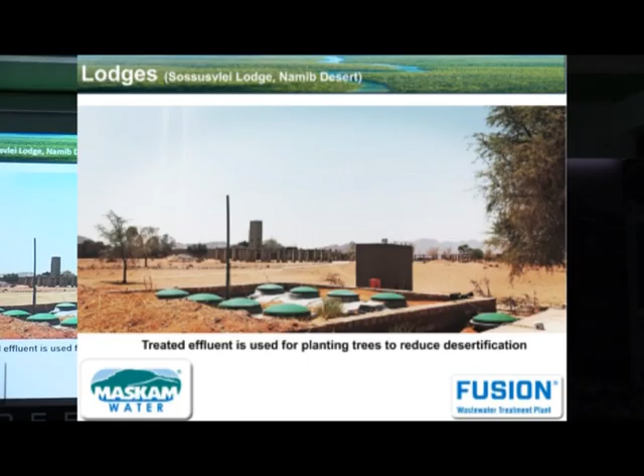The nice thing for me, they didn't ask quotes from anybody else, because they know the system works. They do their own maintenance now. The number 6, they're installing themselves, they're not even using a contractor to do that. That's how nice these things can be. And what I'm trying to say, and I'm not saying this is the only technology on the market. You can go to market and check out what's there. I'm just showing you what is possible, what you can expect out of the system.

This is Curro Bloemfontein. They don't have enough water for the sports fields. They stopped drilling after borehole number 5. And they're using treated effluent now, blended with a little bit of borehole water that you do get, to irrigate the sports fields. But now this was designed for 600 learners at school, and they're now just above 800. So the system is too small, so we have a problem.

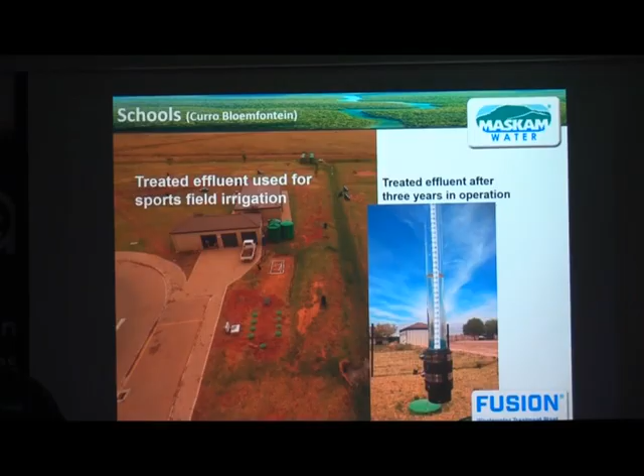So what do we do? Take it out, redesign, redo, rebuild? No, we just add another one. And if they go beyond 900, we add another one. And then if they go beyond 1200, we add another one. And so we can add on without having to write off anything that was there before. Wouldn't you like that for your customers, sir?

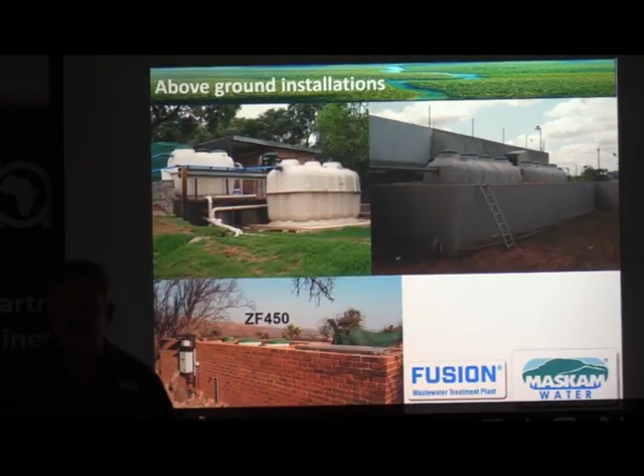Above ground installations, that's American School in Maputo. That's up Centurion Way. This is in Mpumalanga. There you can see a screen. That screen will remove inorganic matter, so that needs to be cleaned by people on site. For a single house, you can omit that because you can control what's going down the toilet. But for places where you get all these other funny stuff.

The one problem they had at the DP building, it was about 9 months into operation. I got a message and they said the system is flooding. I said, well, the installer must go and check, there must be a blockage somewhere. And the installer said he's not working and that's not his system. I said, but you bought it from us, you installed it, just go and check, there's a blockage somewhere. And this thing turned ugly after more than a week of debate on emails.

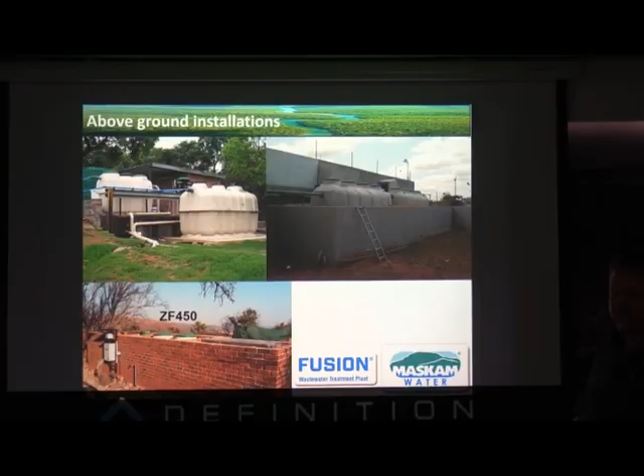And the QS said to me, this system is clearly not designed for this kind of application. This is a domestic thing, you're installing it here in a commercial building. I said, okay, sir. I'll send somebody, I'll pay him to go and look what's going on there. So 2 days later, I sent him an email back with a photo. I said to the QS, sir, you're right. This system is not designed for this application.

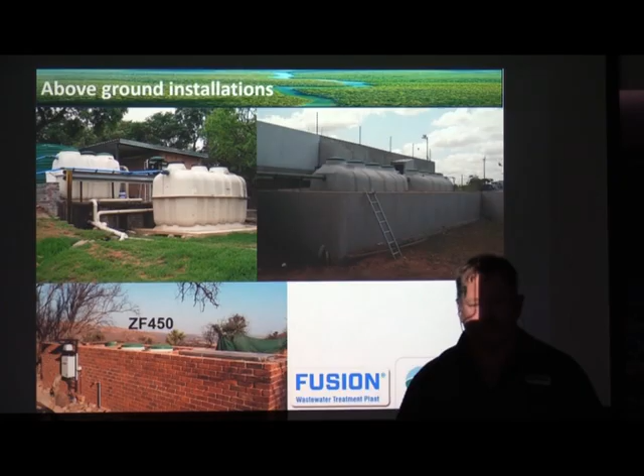This system is designed to deal with sewage, with the odd stuff that comes down the pipeline that's associated with sewage. This system is not designed to take in and handle a 2-meter piece of rainproofing membrane. Contractor went there, found that in the screen, took it out, and the system is working. I said, but given the installer's attitude, I will take over the next 3 months of the warranty period and I will make sure that we hand over a working system.

So you get that kind of abuse. The QS didn't like the fact that I replied to all, but he replied to everybody with these insinuations. Or he copied everybody in, and I just replied to everybody and said, well, here's the problem.

Now in this case, we have a 280 hectare development in KZN. The green fields are sugarcane, and there's development coming up all over the place. To pipe that to one central place is a problem firstly, but also Natal's hills and valleys. Every time you go through a valley, it's an EIA because it's sewage. Can you imagine how many EIAs they're going to do there? I mean, you can see what that looks like, eh? Imagine all the EIAs you're going to do. So what we do is we cluster them. We put them in as we go.

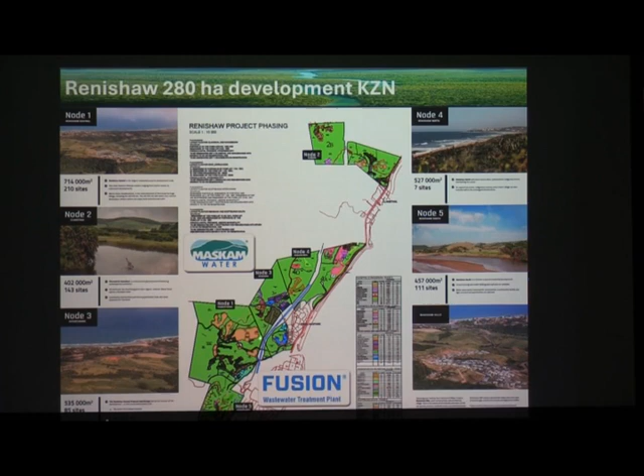They've got a different system here at the retirement village and they're not happy with that one. That's why we're on there now. So the first one we installed is a commercial centre they're putting up here. It's a shopping centre, a church and a filling station. That's just a close-up. And that's what the installation looks like. Will the architects be happy? So for that shopping centre, excluding the civil works, it was about a R4.5 million job, which I don't think is excessive.

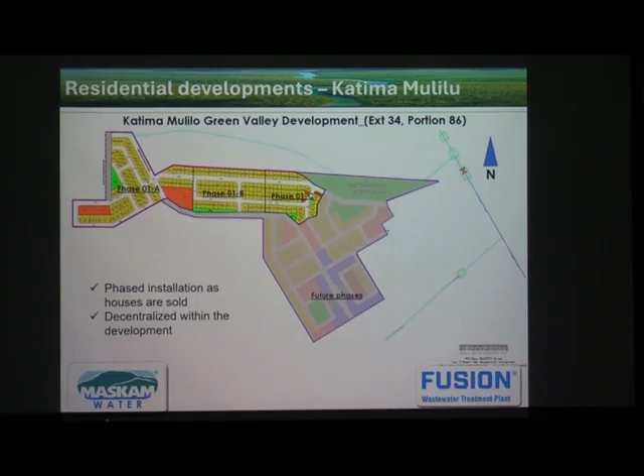Katima Mulilo, we've got a development right there in the middle of town, but they don't have capacity. It's gap housing. So they're doing it in phases. That was the first one, the next two phases. And that's what it looks like. There's the houses at the back. And the other phases will get these systems. Those phases drain to this area, and those phases will drain to these areas. Because it's flat, you don't want to run all the way from here to there. Your pipe runs become too long. The nice thing is the developer doesn't have to fork out all the money now for the future houses.

But now to show you the flexibility of this system: if you have that size capacity wastewater treatment plant, you will write that off and build a bigger one, okay? For this one, we removed the old 2 to reposition them, and they become part of the battery of 19. You can see them at the back there. So that was installed in 2017. 8 years later, we recover them, we just make them part of the bigger system. No additional cost. How beautiful is that for your customer?

Campsites? You're sleeping right next to your plant there. Just getting romantic now. Cango Caves? They're flushing toilets on the 3rd floor and they irrigate the gardens with a treated effluent. You can see how nicely they bunk it in and hide it away.

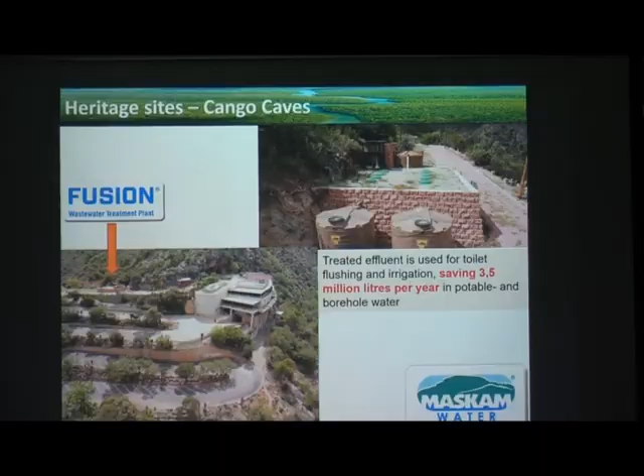And if it's difficult to get to places, we make plans to get them there. There's no place we can't go. First of all, you needed a 4x4 to get to that point. You had to leave the trailer there, drive up the mountain and use the winch to get it to where it wants to be. But it's possible. Now you can put some reeds around there, plant a bit and you don't see it.

Wind farms, the site offices of the wind farms. This is a construction site, so construction companies now buy this. They use it on their site. This is a construction site for a wind farm, but this one belongs to the construction company, not to the site. So they finish there now, they pull the plant out and they move it to the next site. So they purchase once and they keep using it.

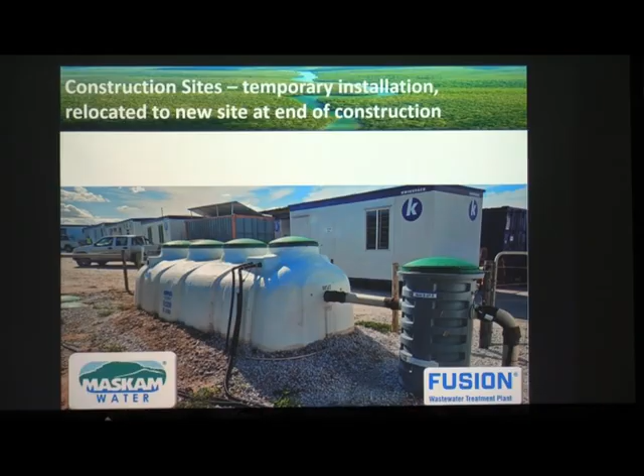How long do these things last? Well, the tank is fiberglass, inside is polyethylene, PVC and polypropylene. That's not really going to go anywhere. But frankly, I don't know how long they last. Because the first one we installed in 2010 in Franschhoek. You can see the water conditions there, the site conditions. That's the guy's bedroom window here.

Last year he decided to move the house because it's too wet there. So they got somebody to take it out. The guy took it out, broke off the pipes, he ripped off the extensions. You can see they all ripped it out. And they broke one of the cages inside. 20,000 rand later, that same one is going back to sale. 15 years, 20,000 rand in fixing the damages caused by the contractor. It's going back to sale.

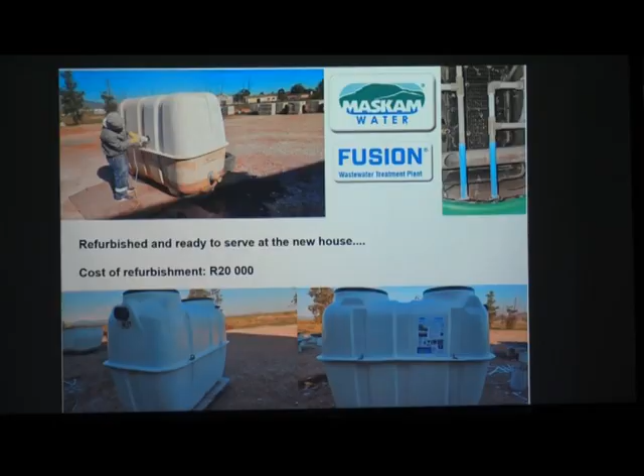And in Botswana, we installed back in 2012. Last year they rebuilt the camp. And the contractor moved it to a new location and it's up and running. The project manager for the rebuild of the camp just moved the plant to where he wants it and it's back up and running, serving the same camp again for the next 15 years. Isn't that beautiful? How often could we take something and run it for 15 years and then just relocate it?

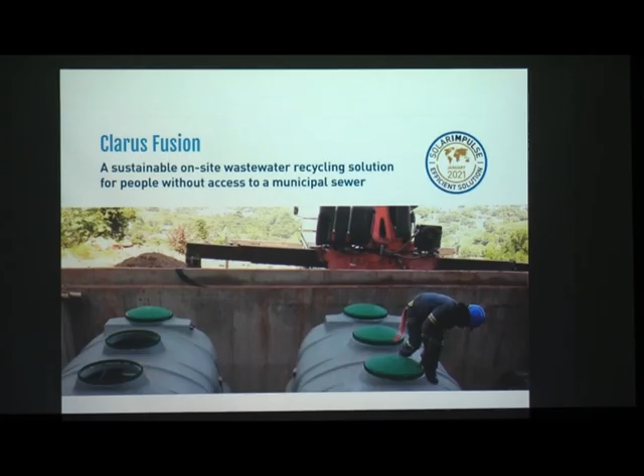Maskam Water is one of only 2 companies in Southern Africa that bears the Solar Impulse Efficient Solutions label. It's 1,000 solutions that they're looking for that's already in commercial stage that makes an impact on electricity and water consumption. So there's a whole checklist and stuff you have to go through. And we're one of 2 in Southern Africa that's got that label. We were also invited to COP27 to present our solutions there. Some other stuff that we got, water meter of the year, environmental heroes.

And this is where we do enterprise development. I said we've got people close to you. So we manufacture, we import pumps and stuff, we distribute to regional distributors, to installers. They will install for the end user and they will also be the service contact. But here we build a network throughout the country and throughout the region. And this is where enterprise development comes in. Real enterprise development, I'm not talking about the political one. So we take plumbers, installers, irrigation contractors, whoever. We give them an additional product to add to their business and we train them on the installation and the maintenance at no cost.

But that means you can have a customer in Cape Town where you can service him, you can have a customer in Bloemfontein where you can service him, you can have a customer in Durban or in Nelspruit or in Sossusvlei or in the Delta and we can service him. It doesn't matter where you go, we will be able to help.

So in closing, I want to say that organic wastewater is not a waste. It's liquid gold. So let's change a little bit how we think. And let's think sustainable solutions.